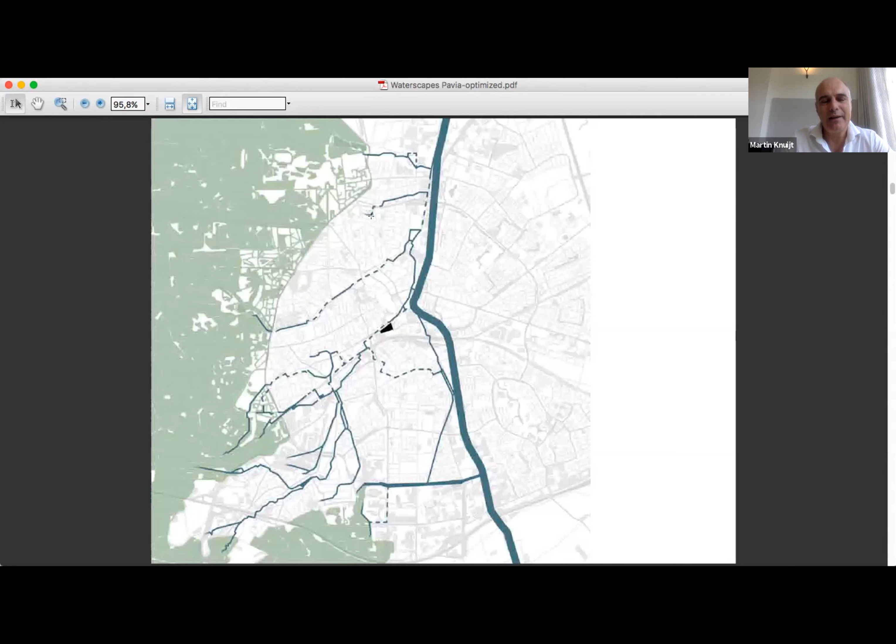The project area you will find in black. But what is important is actually that the city has already been working for about 25 years on restoration of this small brook system. And we advised them in this to bring water from, again, within the city, to disconnect urban areas from the sewer and bring clean water at least to these brooks, and then have the sewer only available for black water.

Once we zoom into this small area, the original situation was that there was a parking lot, and the parking lot was completely taking this place, and the brook was not present anymore. It was just in a tube underground. So that's the top image at the left. And then we first thought, okay, what we need to do is bring the brook back in space, because it is valuable water. And so we brought it back.

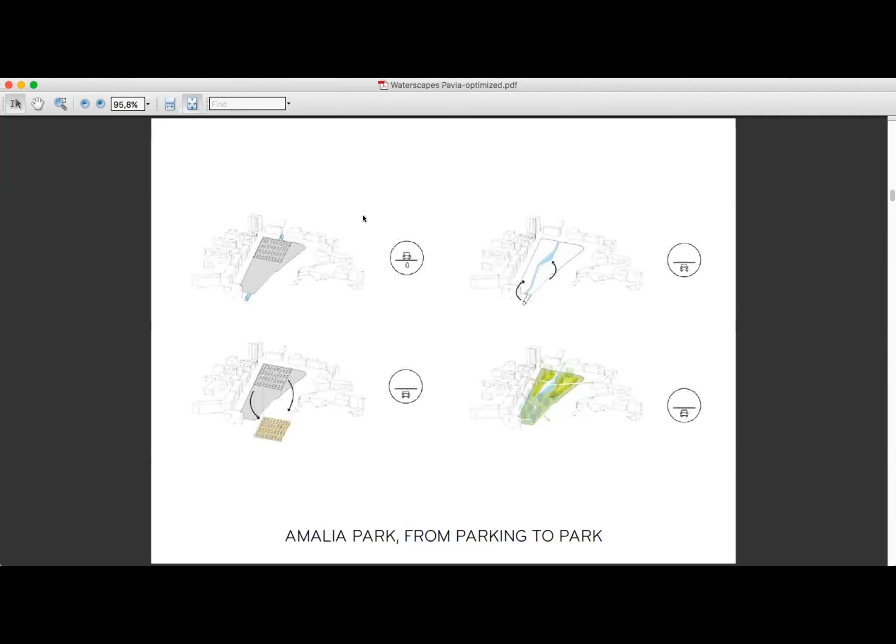That means that, of course, you have to do something, because either you have to remove the parking, or you have to decide that the parking will be underground, in an underground parking garage. Of course, it was easier said than done, but people accepted that at least we should invest in an underground parking garage. And then we said, well, then we also want to make this small inclined landscape on top of this parking garage, so that when you look at the area, it's a park, and it doesn't look like something transformed, as still a parking lot.

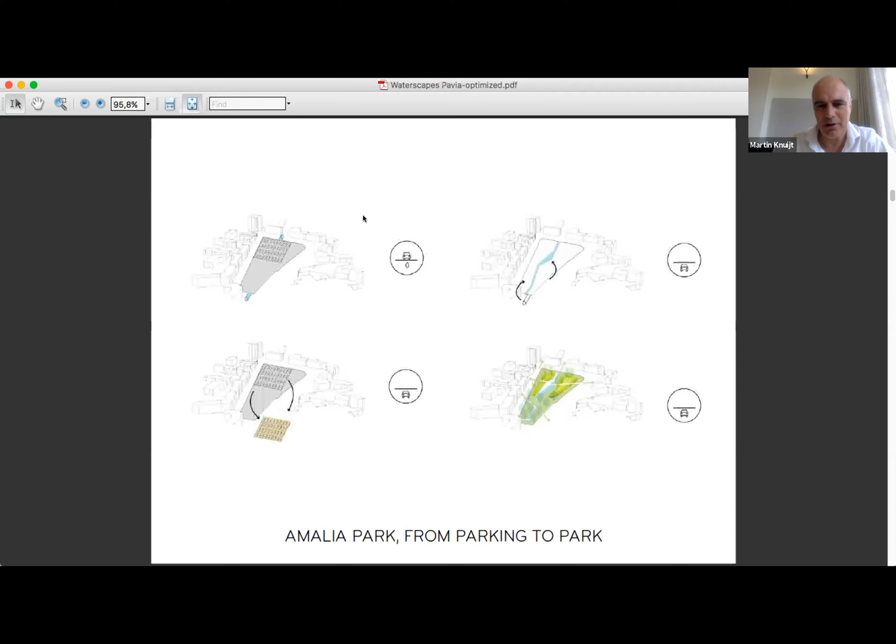So the design was made, and we said, well, it was an artificial brook, so it's not a complete river system, but we want to give this area the notion of being a green entrance to the city center, and also provide the right water qualities. So the pipes from the roofs of the homes were disconnected from the sewer, and this water was brought via underground passages. These underground passages are already filtering, because it's soil. So clean water was added to this brook.

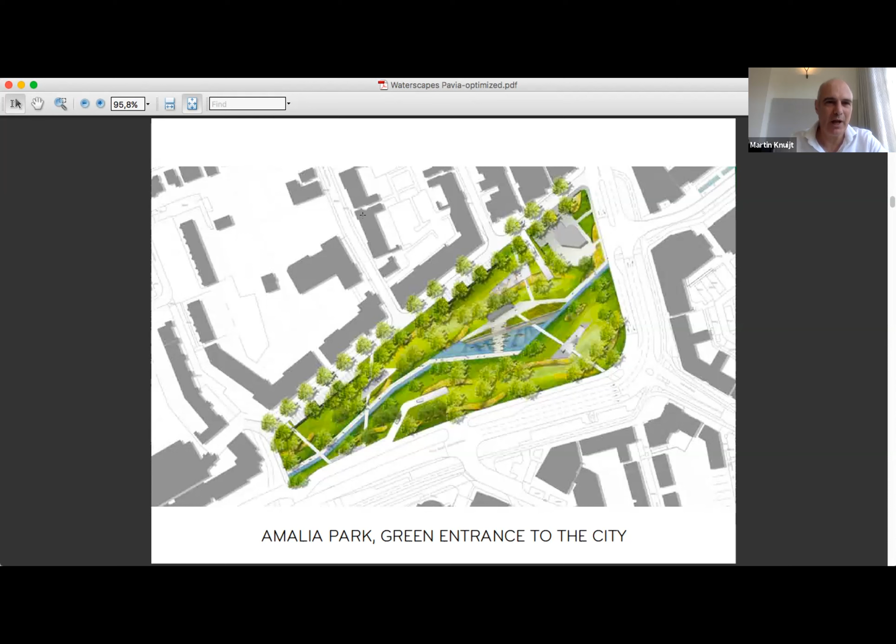We put some stones in it to give it the right speed of streaming, so that it was good for ecology. Sometimes you don't see ecology, because it's just small animals and fish within the brook, but it has its value. So we said, well, let's maximize the softscape. If it's a park, we need to have paths, but it would be better to see only a path along the water and not just everywhere. So we made it slightly hilly, and then we carved the path more or less in this landscape. So from this perspective, you hardly see where the east-west paths are.

And then here you see the brook, and that is revitalized. In fact, you could even drink from it, but you better not tell people that, because if children drank from it and something was wrong with the food in the evening and they had troubles with digestion, people would never blame it on the food, but they would say, oh, you've been drinking from the brook. But in fact, you could. The water is that pure that you can drink from it, even though it's urban water. And this is the image of how you can see it. That's the green connection to the city.

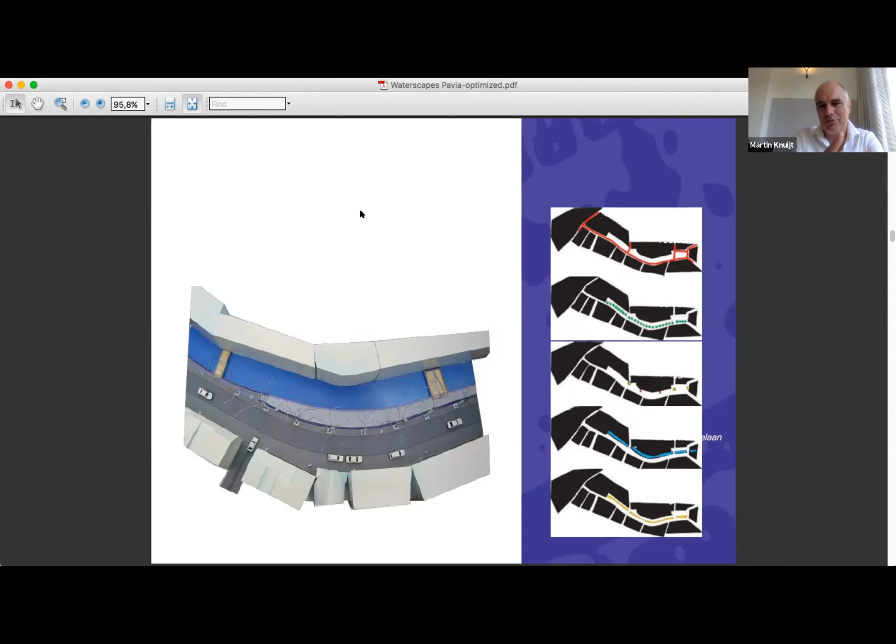We bring back the water, of course, and we said, well, we need also to bring in light. The first studies were just with a simple model to show how it could work. That you organize, let's say, still some through traffic, you organize a walkway along the water.

This is the plan. So gradually we got more into it, and we found out how we could do it with all the restraints, because it's working in a very urban environment. So it's never easy to change the area back. You have to bring a new layer, because it's not about reinventing history, but it is adding to today and tomorrow.

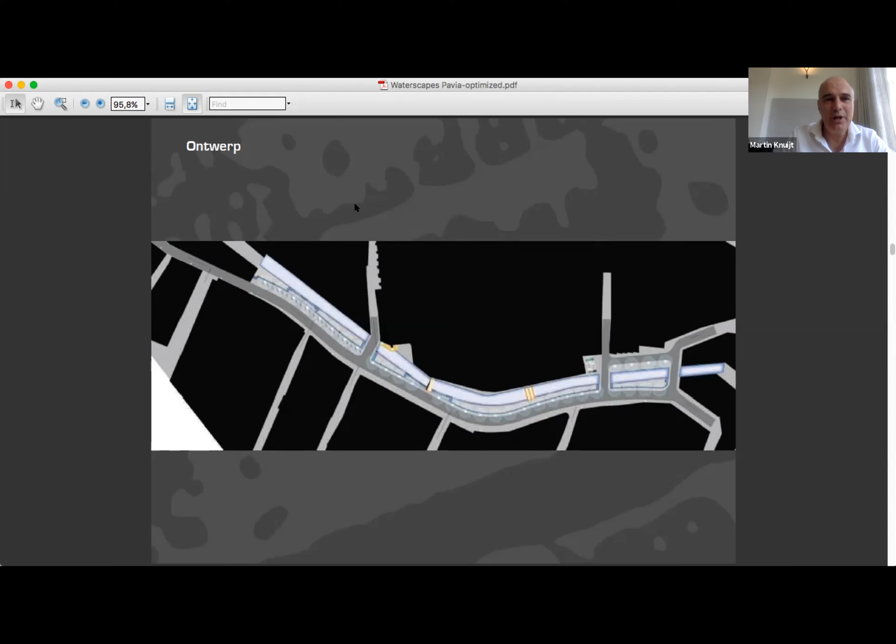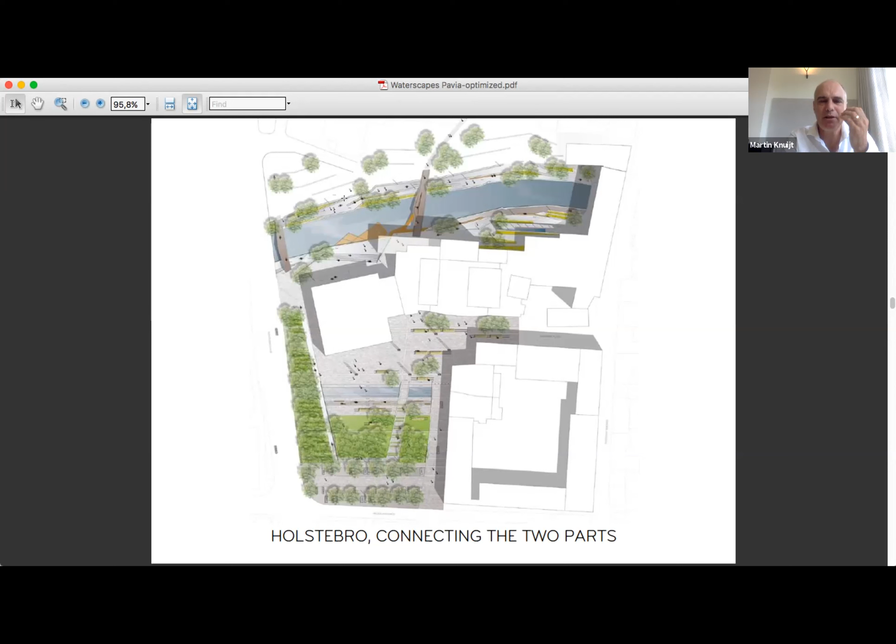At the southern part of the dance theater, there was a parking lot. Again, parking lots. People really liked parking lots at some time. But nowadays, we said, well, you really need to reorganize parking. So in this case, we reduced the parking to the very southern area. And then there was at least space for outdoor events. And in this case, it is also about water as a pleasure.

So the outdoor area at the south, we said we make a small water basin, which can capture the light sometimes. And if, for instance, there's a big event, you can even switch it off, and then you have this whole space available for people who can have a party there or have a theater there. The steps are, let's say, almost like an amphitheater.

At the northern area, there we created the lower area, and always created at some places areas where you could connect. So the wooden steps are going into the water, so people can even use it as a podium. So if there's a small event or something that takes place, it works almost like a theater. And since it was a dance theater, we also wanted to have this function outside, so you can play with it. It's not just only saying we capture the water, we do all these items that are really important for climate adaptation, but we also want to make it a scenery for people.

And now, another picture. The bridge is folded in a way that the bridge also becomes part of, let's say, the area, the amphitheater, so people even can sit on the bridge if you would take the time. And here you see how the lower area has planters and gradually the ramps to the higher areas.

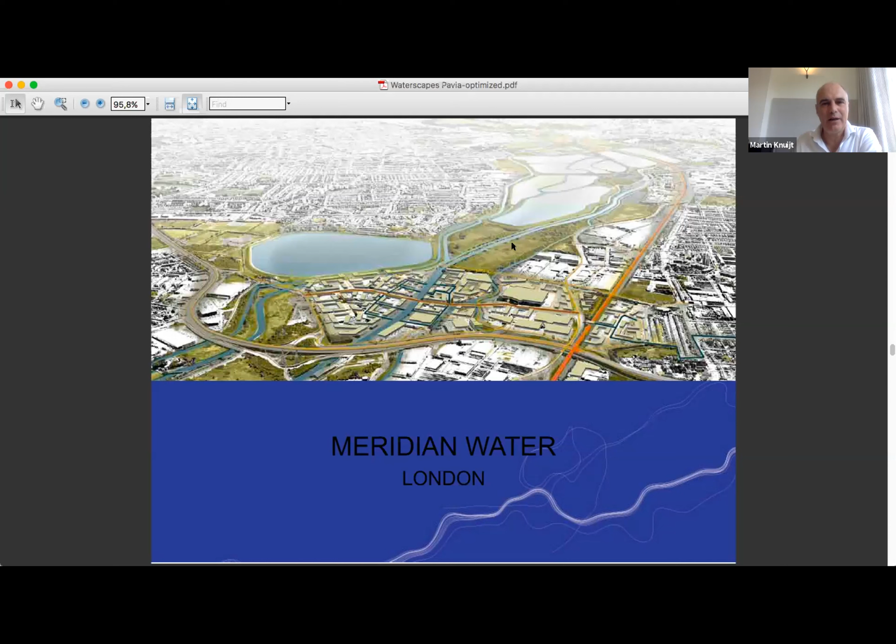On the other hand, there is the old area. This is at the right of the location. Here you see the location in orange. Below you see the River Thames, and it's the River Lee that runs from north to south. At the west of this area, there is Edmonton, and we also made plans for another 85 hectares, which is existing city. So to compensate, for improvements in public realm for the people that actually live in the adjacent area, not to forget them.

In the master plan, we said, well, think about all type of water interventions. We said we are familiar with water, but we need to categorize them in 4 categories. The first category is actually to prevent the area from flooding from upstream. There are 2 brooks, the Salmons Brook and the Pymmes Brook, and they bring water, and also the River Lee brings water. And then once there is a large amount of rain, of flash floods, the area can be inundated. So the first category is the protection category. And you can do that via dikes. You can do it via inclinations in space.

So there are all types of instruments, and we made an icon for each instrument. And we also labeled them in terms of, will it be easy to realize, what will be the cost. So in fact, every icon corresponds to a page of a document. And the document was, of course, also provided to the government.

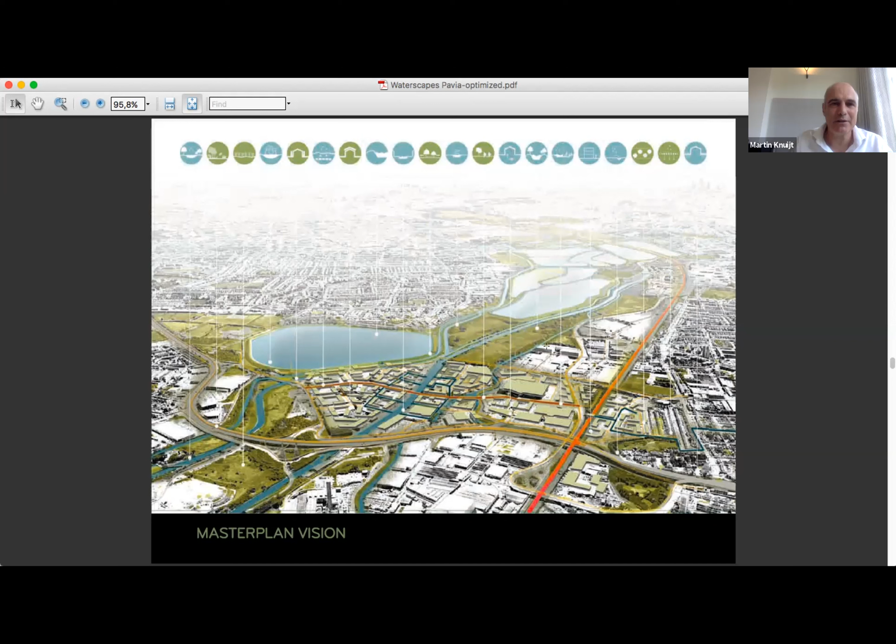You have seen it already in the Danish project, the Mechelen project and the AUDe project. We also try to make it an urban space. So water as a pleasure for people is also an important issue, even though it's not the protection directly, of course. Here you see some of these tools. You see a new canal and another new canal. You see the urban development in between. You see green roofs, green inner courts, green along the courtyards.

So we try to capture the water within the block, bring it back as slowly as possible to the urban public realm, and then gradually store it, of course, in vegetation buffers. We raise floors, so make sure that the floor level of the building is not really affected. And in the more natural area along the River Lee, we also use this parkland for water retention.

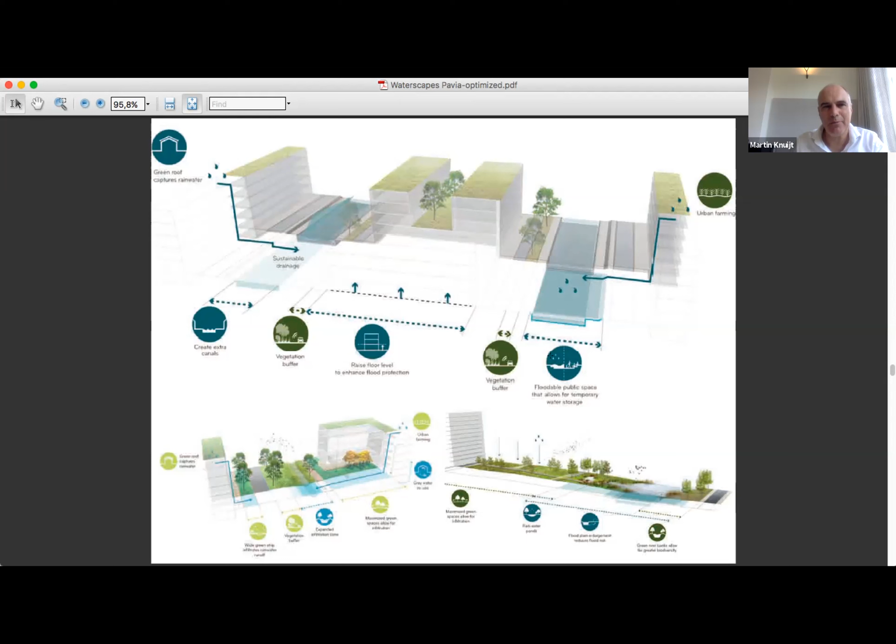At the right bottom you see the natural area, and we slowly slope it with some inclination. So if there's sometimes a little bit more water, we capture it, and you get situations where you actually have water for some longer time, and you have different gradients that increase biodiversity. And here another series of these sections and tools. You see in every urban situation, you can apply different tools, and the different tools are linked to this book of the toolkit, as explained.

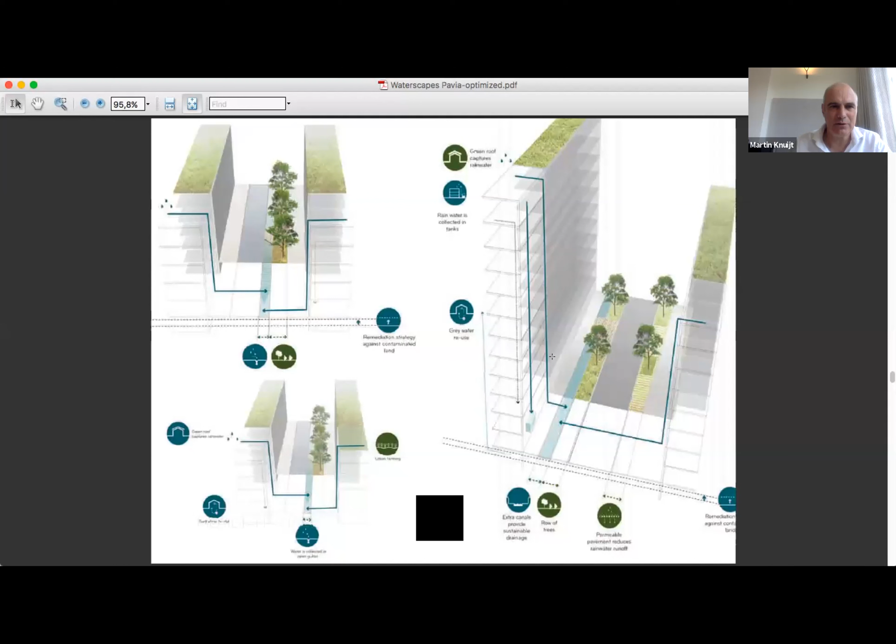Then in the first phase, we said for Meridian Angel there should be 1,000 homes, but not built immediately. So this will start with half. Then we said, well, okay, in this area you can already start thinking green. If you're not building up everything, maybe you could make your nursery for planting here. That makes sure that if you plant trees in the public realm, at least they've been raised in this area.

So you already have the advantage of getting larger trees for the price of a smaller tree. You also have an area that becomes more attractive than if it's just wasteland. So the nursery is also a quality for public space. We also said, well, you can do some urban farming here in the meantime, and of course at one moment it will vanish because gradually you build up the area, but it can also move to the next phase.

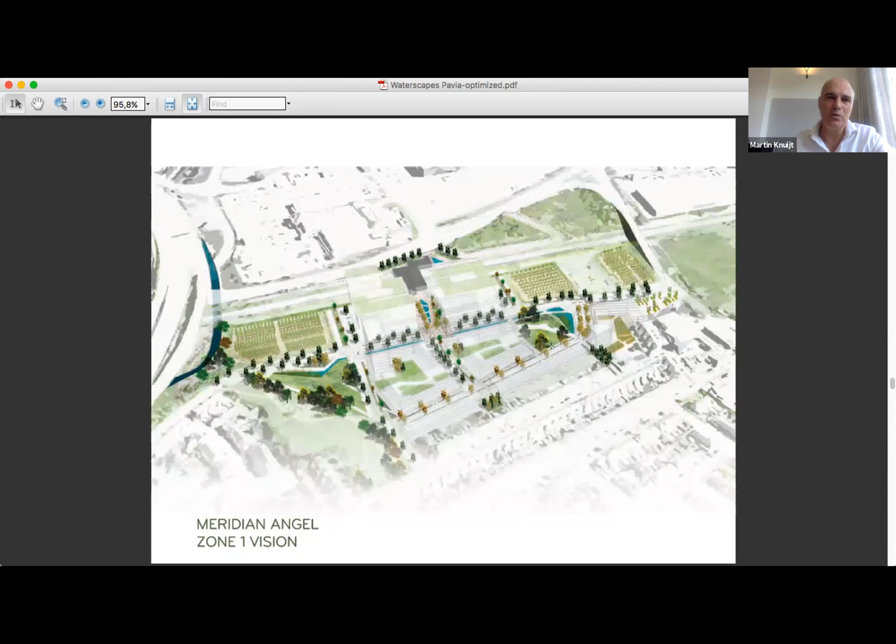Here on the larger scale, you see there's also a kind of link to the tools. If you look at the smaller area, this is along a brook, this is how it can work. The brook had all hard edges, so we change the hard edge into a soft edge. We make a gradient in one area where there's a lot of space, and gradually the brook can expand if there's a lot of water. But once you need the water for the planting, we also make sure that it can infiltrate, so it's all soft landscape.

We make the green banks softly sloping, so you also get this gradient, which is interesting for diverse plants, and also make sure that the water itself is pure and purified, so that it's also worthwhile for ecology.

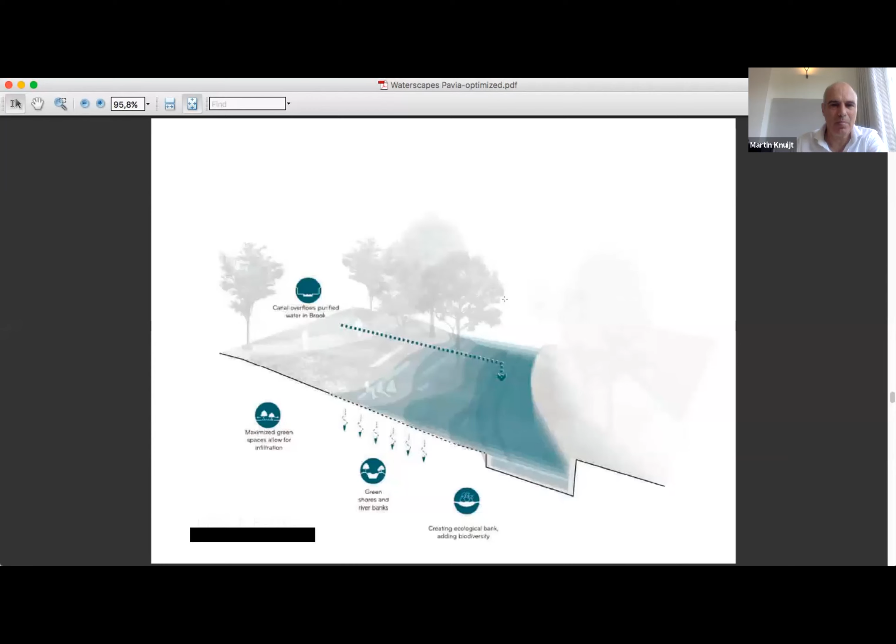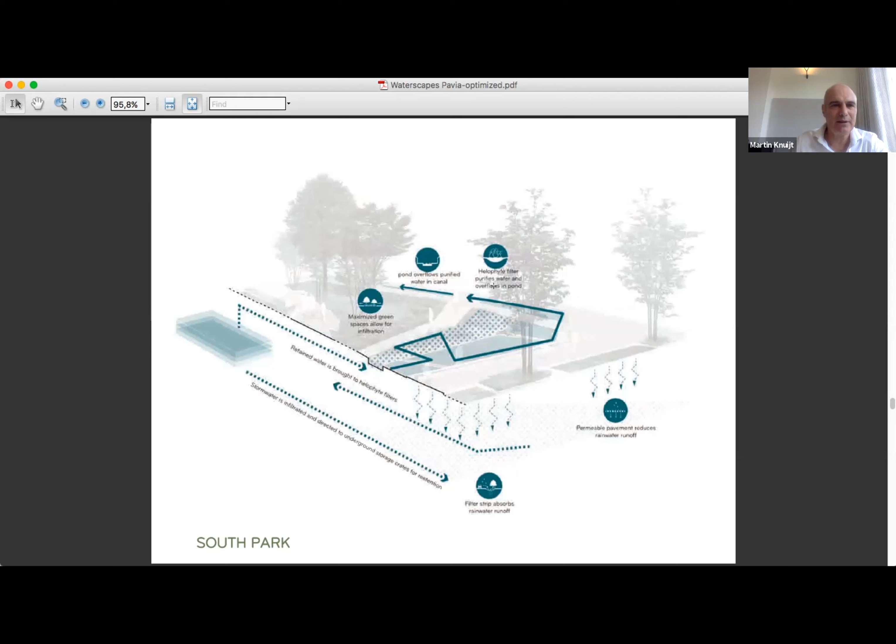This is another diagram of one of the parks where we capture water and bring it back. It's a park more in the urban environment down south, so there we are not linked to the brook itself. We capture the water and create a water pond. We make sure that the water is also celebrated in a small park, that there's some infiltration, and at one moment we bring it back into a small canal, and that canal leads to the brook.

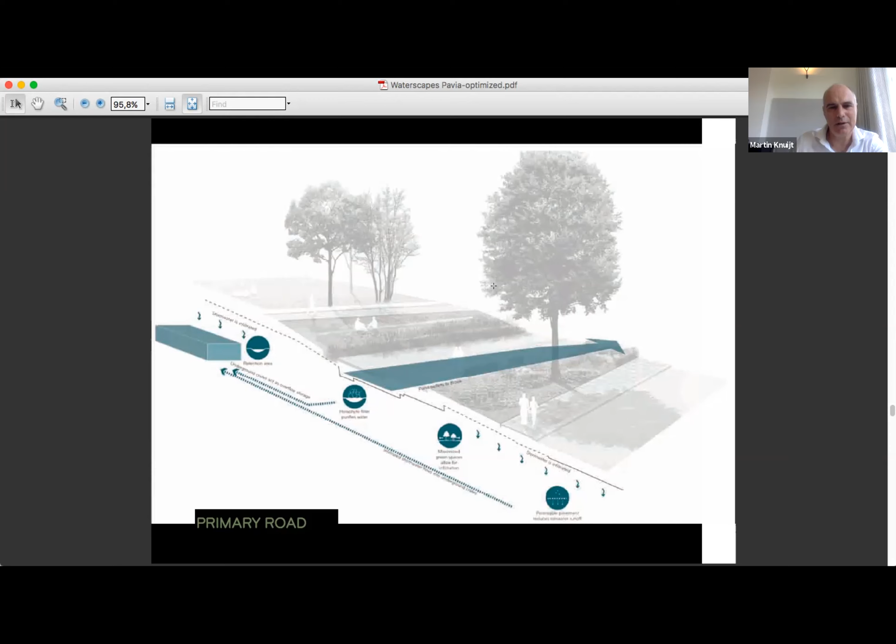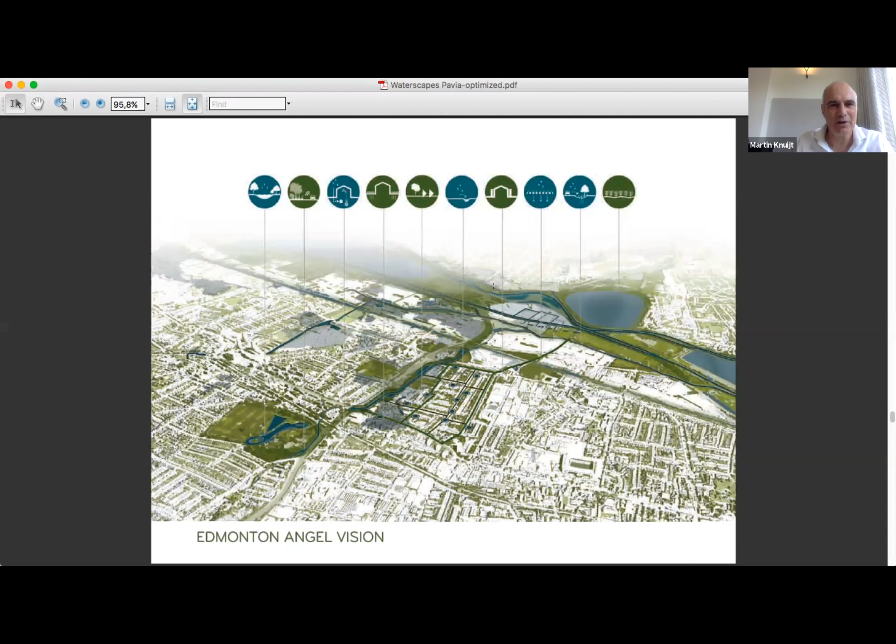And on primary roads we also expand our system so that it connects the water for the adjacent area, which is actually a very densely populated area, and where even more people nowadays live, because some of these homes are quite big, and they were changed over time to 8 apartments instead of just one home. So there's a lot of parking places in the area. The public space is asphalted. Sometimes even the front gardens were completely asphalt or concrete.

So we said, well, if you want to change these 85 hectares and you don't know which area you can start first and you have a limited budget, you should have a strategy. And the strategy was, let's bring in rain gardens and let's bring in tree planting. So we said just plant as many trees as possible. And most of the time we start thinking about a realistic number that could be achieved. It's also putting some pressure on the officials to really realize it. Once we are gone, it's really funny, but in many places I've heard that the number stays.

1 month ago, I had a talk with one of the city officials in Rotterdam. He said, oh yeah, once you had this vision for Rotterdam city center, you said that we should plant 1,000 trees. You're a really nice guy, he said. Yeah, now I'm at 950, but it's really hard. So 7 years later, he was only at 950, but he's still trying to get this number of 1,000 in. And I liked it very much because, of course, he had this problem realizing this, but since he was an official of the city, he's still working there. So he needs to do this. But the nice thing is that we get these trees in.

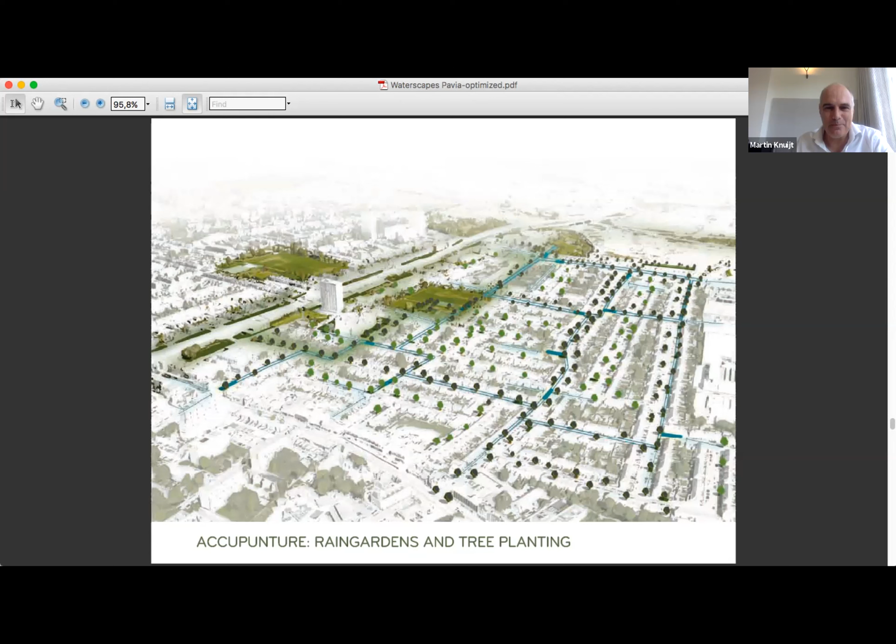And here you see the public-private intervention. So even in this water story, we try to create green roofs at some places, try to create green corner gardens, and include also the private area. So for the private area, we have tried to make some people enthusiastic, because the city, of course, cannot do that much. It is private land. And for the corner gardens, it's city's land. So we said it's really important to start at the corners and make these green, because that also is very important for the image of the street.

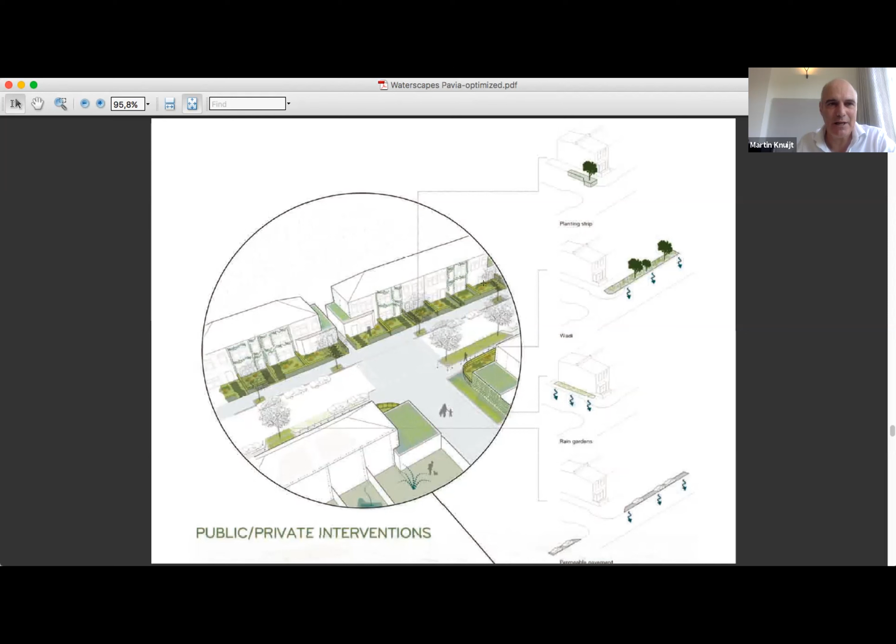Nowadays, it is a street with only cars parked at both sides. If you just plant some trees at the corners and create a green corner garden, then already at the entrance of the street, you see green instead of parked cars. So it's not the number of parked cars that you change that much, but it's changing them at a strategic position. And here you see one of the images, how it works.

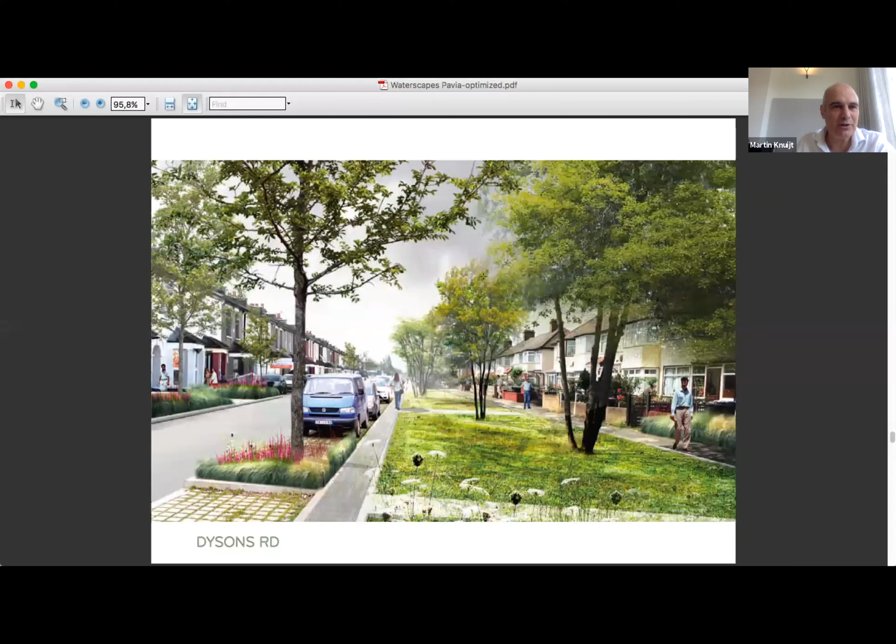So we said, well, we create what we call a wadi that is suitable for water infiltration. We create parking places where at least water can infiltrate. We planted some trees, not only at the corners, but also some in the middle. So with just a few trees, we already changed the perspective of the street. And the strategy is also that it can expand. So in streets where you can reduce parking a little bit more, you plant some more trees, and you can even change it over time. You don't need to do it all at once.

The last project I would like to show you is Athens. We are now moving to a southern European city. Many of these examples were northern cities. And of course, you can say, well, in the north, you have a lot of water. So there, it's fairly easy to capture the water, to make it infiltrate and make it work. You might have a bit more problem with flooding, but in the south, it's different. The bad news is that, of course, it's a bit different, but it's not that different. In southern European cities, there are also a lot of flash floods.

And when I told the people from Athens the strategy to capture water during winter and make it available for the summer, they said, oh, we don't have that much water in winter, so it doesn't work. But just 2 weeks after my first presentation, there was a really big flash flood, and cars were actually floating in the city. So it happens, it happens.

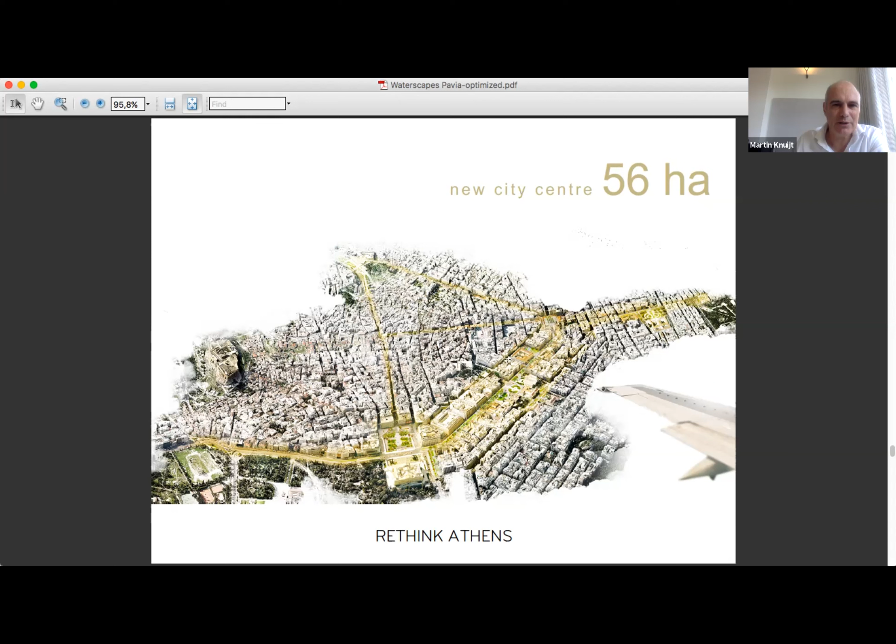The project is about 56 hectares of new city center. Our existing city center, but new transformation, that's how I should say it. It was called Rethink Athens. So it was thinking about how the city can change. And imagine the main corridor, the dotted line in the middle of this picture, from northwest to southeast. That is Panepistimiou, and it is 6 lanes of cars, 6 lanes of cars in the city center.

Of course, in Rome, there are some big traffic arteries, although now there's also a policy for change. In Milano, you have some big arteries, and they are already under change. But this is even more, and it is really close in the city center.

So we said, as a first approach, that first in the city you should create a coherent green network. There are already large green areas, but they're not really connected to the daily living environment of people. And you should link also these areas to each other. Then at least you get ecological value. You get also a value of, let's say, green corridors in the city.

Meanwhile, we were thinking about heat mitigation, and what you see here is the tools for heat mitigation. We also try to approach it in a systematic way. So there are tools: the green tools are linked to tree planting and all kinds of green elements. The blue ones are linked to water in the city, and the other color, which is, let's say, a fairly vague orange or pink in between, is linked to hardscape.

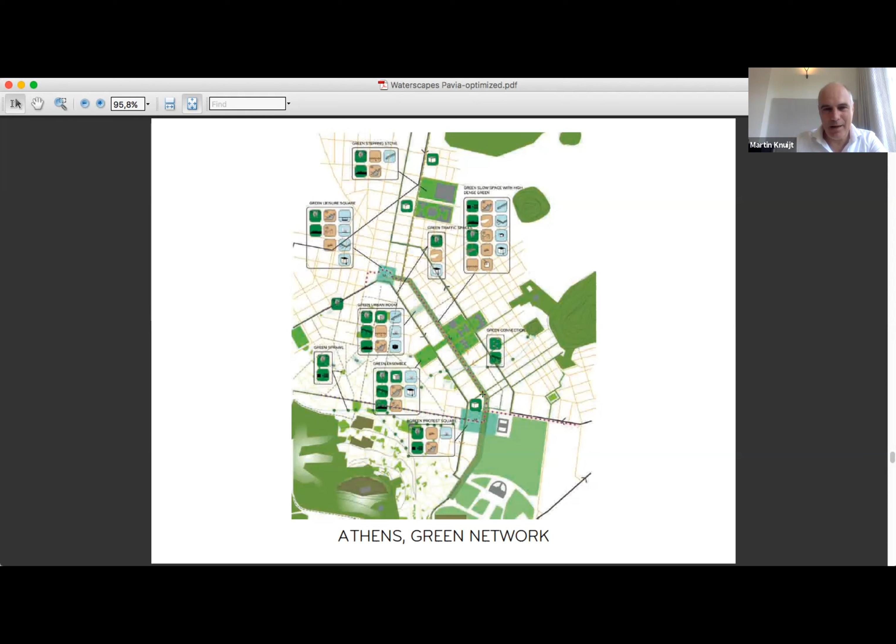Of course, if you want to do something on heat mitigation, tree planting is crucial. A tree makes 7 degrees temperature reduction on a hot summer day at this very spot of the tree. Water, just 1 degree. So that is quite a big difference. To plant trees and to make these green structures, you need to change mobility. So we said, well, first we're going to change movement to make space for green.

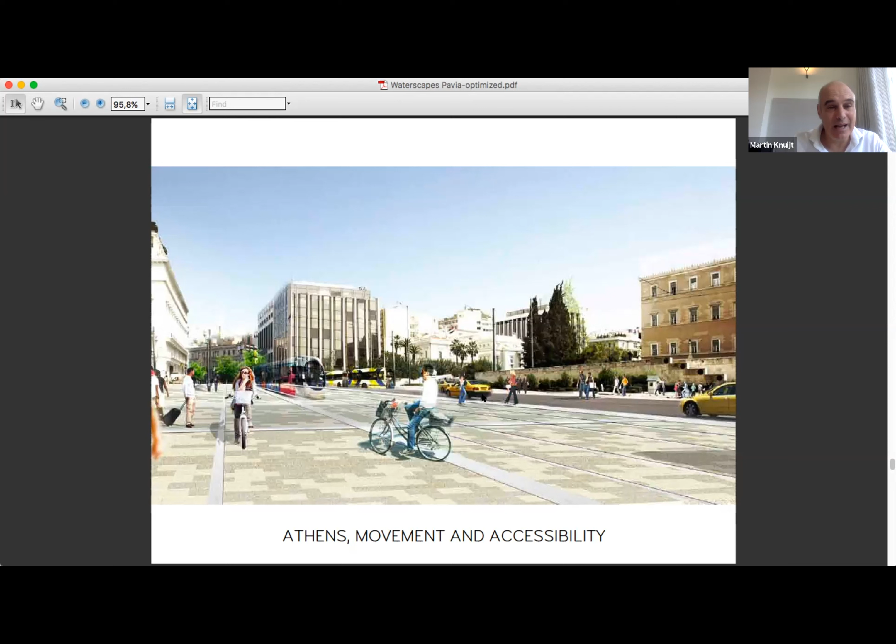So it's not just that we dislike cars. Everyone can drive in a car. But mobility should be rearranged. So at one moment you should realize that you should leave your car and take the public transport or take a cycle. So if you get more adapted mobility, thinking on where do I need to be, what time can I be there, and what is actually the accessibility available, then you can actually change public space because you don't need that many cars.

And if you think about what is actually the space that a car takes, let's say one car, if you take the 12 square meters that a car takes, many pedestrians can stand there. So a car with one person or many pedestrians. So we said, well, we need to change it. We should start thinking from the pedestrian, because in the end, we're all pedestrians. Even if you come by car and park your car in a parking garage, to your final destination, you're a pedestrian. So the pedestrian, we put in focus.

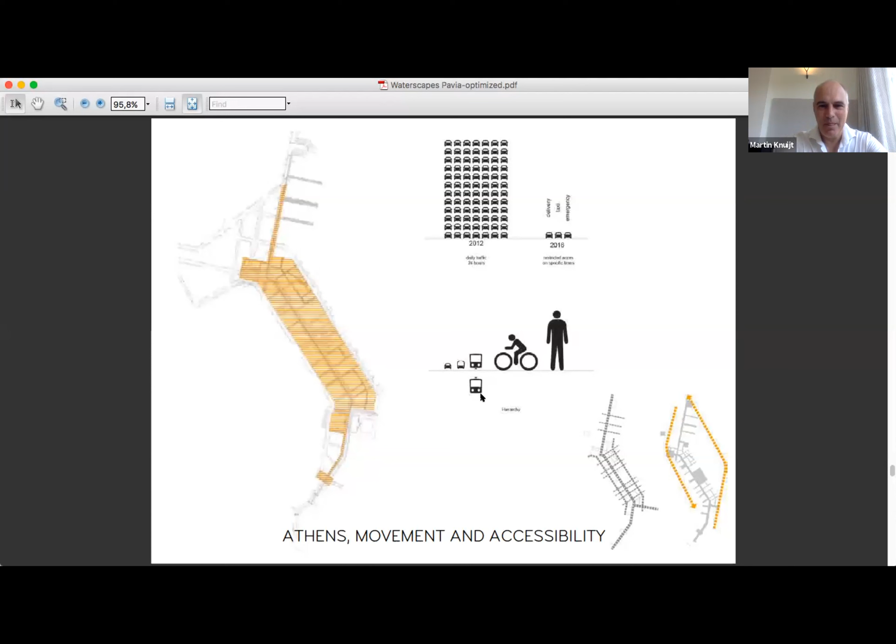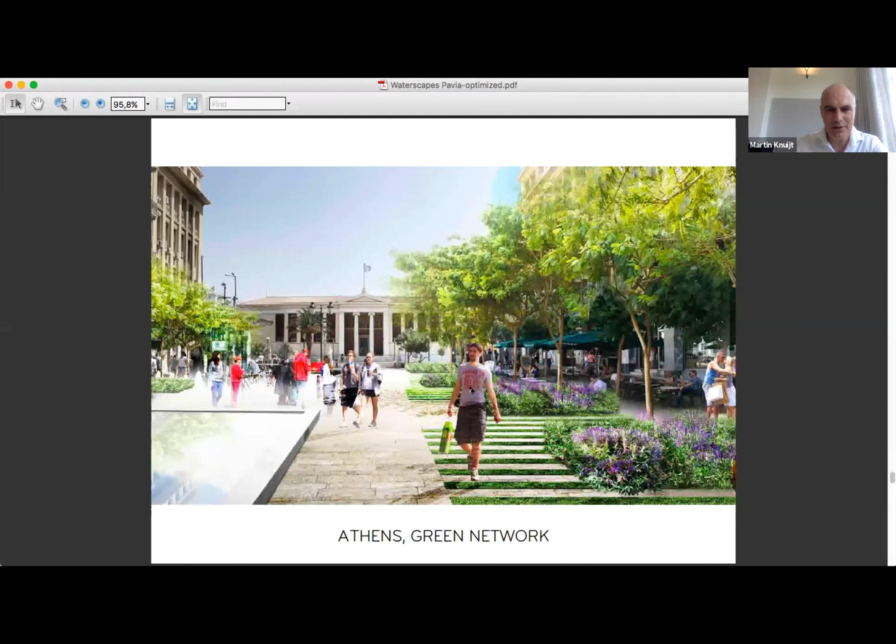The true capacity of trees is the 7 degrees you get at this very spot of the trees. But if you design it cleverly, you can achieve 1.5 to 3 degrees on every single piece of this whole area, even if there's no tree yet, because in the end the tree is actually creating micro winds. Because the tree leaves evaporate, these micro winds create a little cooling effect.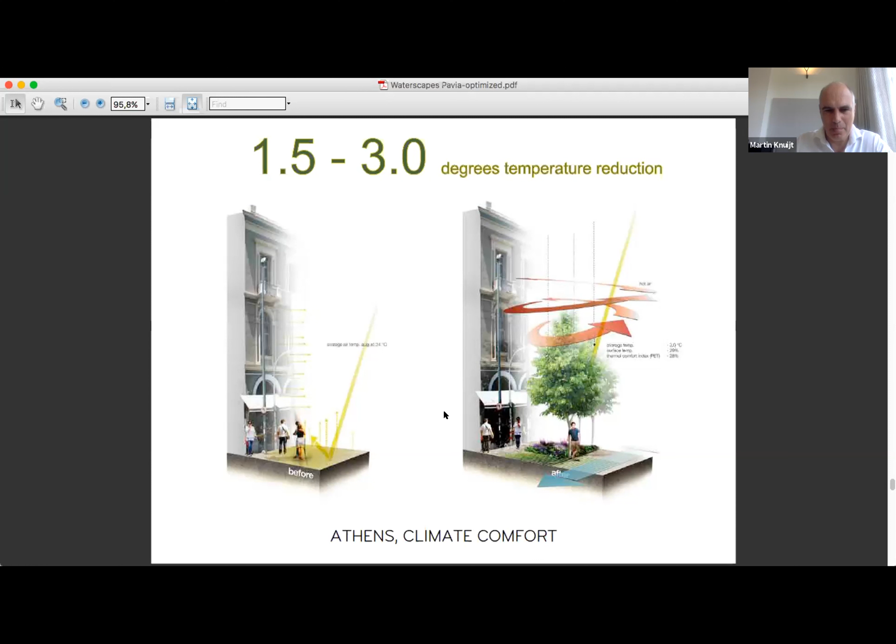It also means that there's not only the real temperature reduction, but there's also the index for how you feel. So if there is less reflection of this heat during a hot summer day, it also has a big quality for people's perception of heat. Meanwhile, we said, well, apart from shadow, you can create more diversity and you can create seasonal effects. So with this planting, you can also contribute to biodiversity.

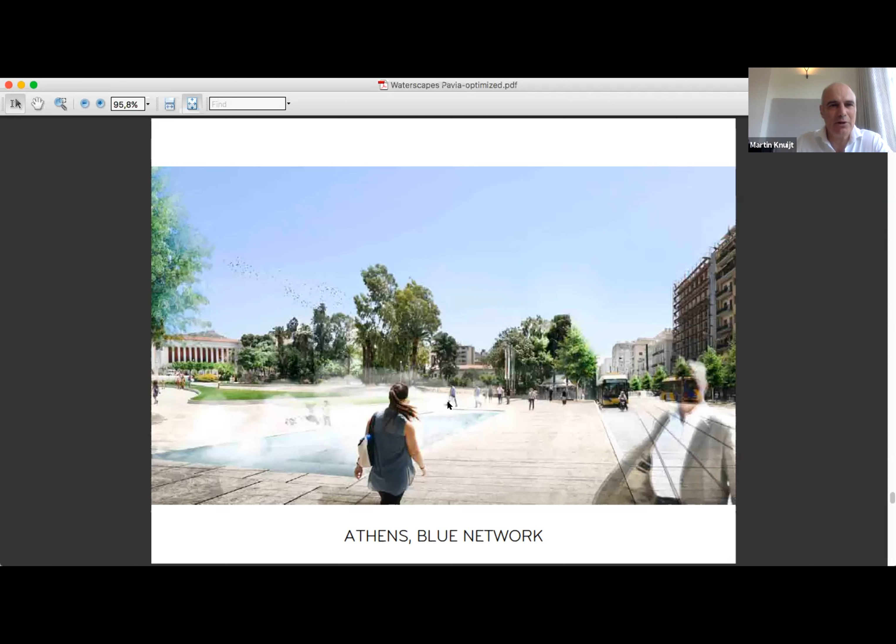The blue network in this case is not a network of rivers and streams. There are already some rivers somewhere in the city, but mostly covered and hard to reveal. But we said, well, what we can do is capture the water from the hills and store it in underground crates, and make a connected system of this. So that's actually the blue network. Here you see how it works. And initially we were close to 11,000 cubic meters, but then I spoke to one of the professors, and he almost got tears in his eyes.

He said, if we can get this for Athens, it would be really great. But he said, could you just ensure that it will be self-sufficient? So capture as much water as the plants need. And then we tried to enlarge the system a little bit more. This is more than 20 Olympic swimming pools. So it is a huge system, but it's done in a linear way.

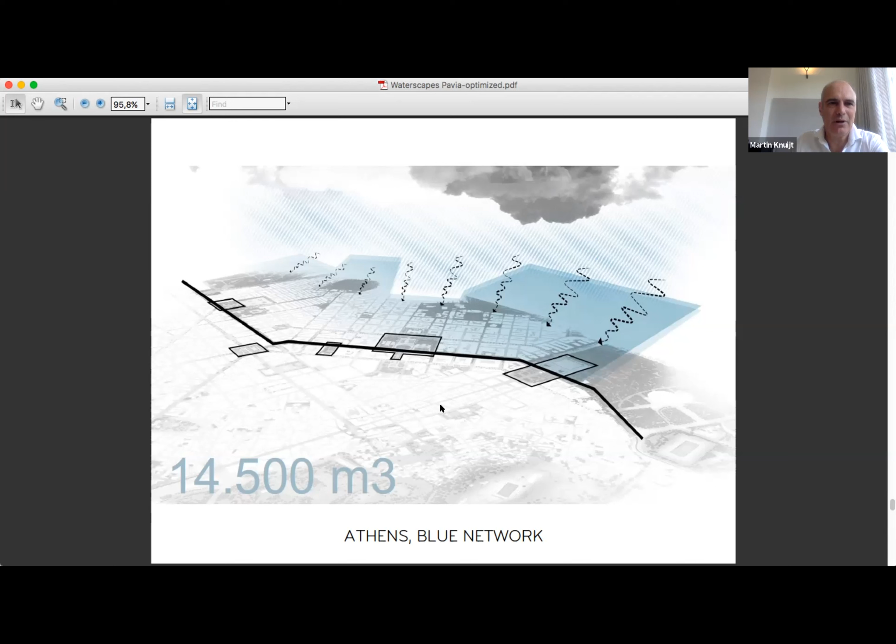So that's how you can bring it underground. And here you see how more or less it works. During winter, there is some rain. There's a wet period. It's not as wet as, of course, in Northern Europe. So the system is dimensioned so that in April, every crate will be full. And then gradually during the summer months, you take the water from that system for the planting.

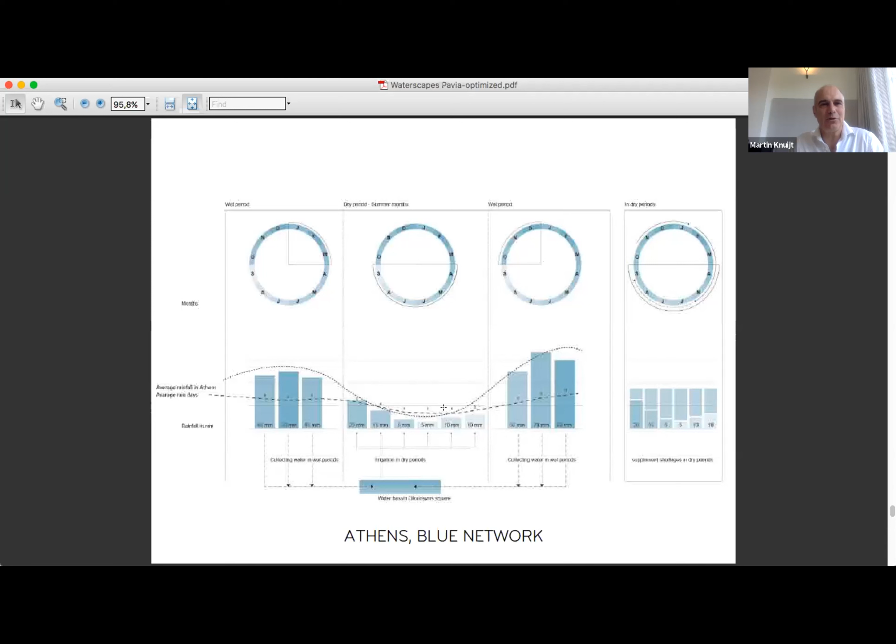The trees can evaporate, and then at the end of the dry period, gradually when it starts raining, hopefully your crates are just not empty, and then the system starts to fill again. That's how it's been thought.

Meanwhile, we also said, well, apart from that, there will also be the activation of public space. We're not just making this nice boulevard for shared space, a tramway, cycling and walking and taxis, but we also need to think about how the mobility system works and how we can activate. That's why we also created the theater of 1,000 rooms.

It was an invention, it's just a word, but I found out that during classical history in Greece, a theater was an important social feature. So people not only went to the theater, but afterwards they met people and went for a small drink or something to eat. So it is not just the theater, but the whole social aspect of it. And the theater was accessible for everyone. People with lower incomes paid less than people with higher incomes.

This whole social notion of the theater means that at one moment you can actually design with it. So I said, well, let's make the theater of 1,000 rooms. There are a lot of vacancies in Athens. At Omonia, up to 80% of the buildings are vacant. That is really a problem. The public space is dangerous. Some places are places where people don't dare to come. That's how the city center has been degraded. So the problem is much bigger than in many other European cities.

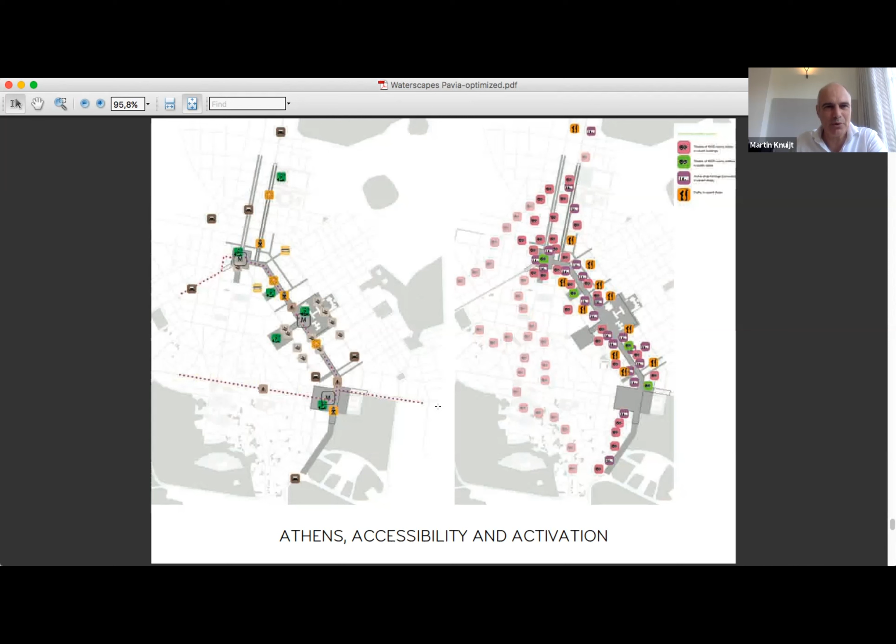So at the end, when we had made the definitive design, the project was presented in the Stoa, close to one of the squares, and these shops were filled temporarily. The Onassis Foundation, our client, filled all these empty, vacant areas, and suddenly one of the areas was vibrant. Of course, it was a short-term project, but at least you could see that it could work. And we are also thinking about how to create public space, sometimes in the open space of buildings.

Oh, I see something wrong. We're almost there, but now to the last pictures.

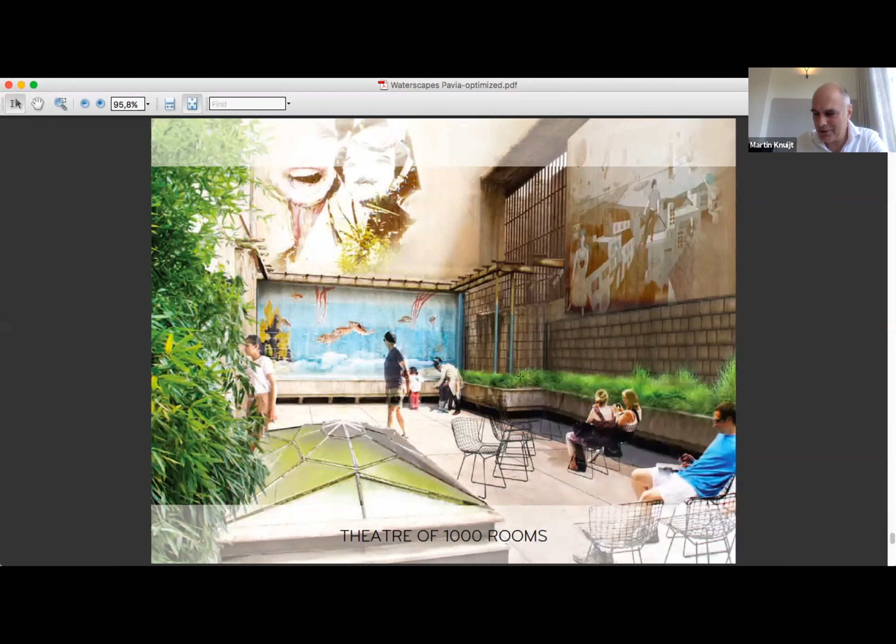Yeah, one of the big things was to connect spaces and places, and I think that's how not only this biodiversity and water story works, but it works for people here in the inner city. Unfortunately, it's not realized yet. The government was at the end of its term and didn't get the European funding. But there are talks ongoing, so we hope that in the near future we will complete an amended plan and then at one moment change Athens.

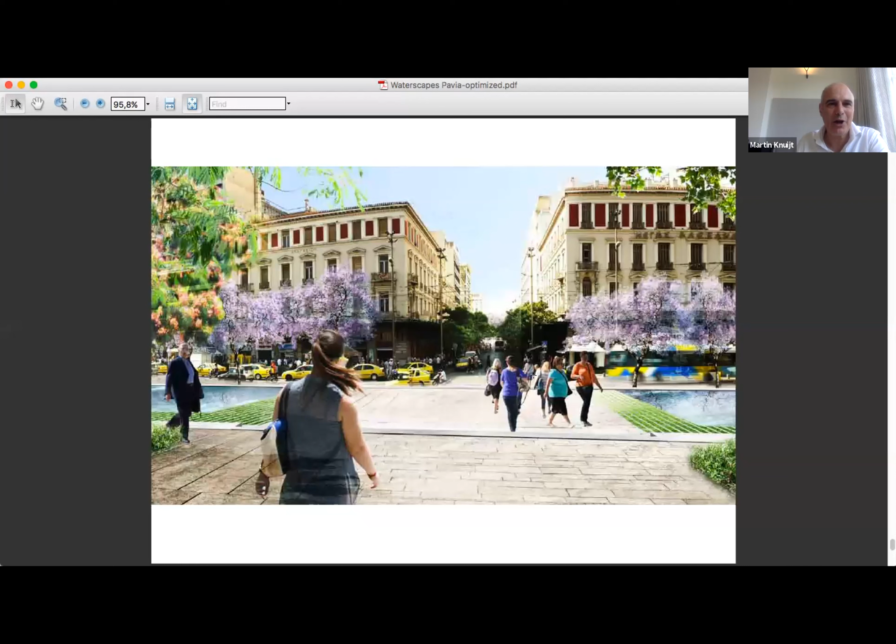What is the storytelling? The story of urban water interventions, I think, is thinking about how we can live in the city and how we can turn our spaces into more attractive spaces. How can we make them healthier for people? How can we enhance our quality of daily life? And I hope my lecture will bring some inspiration for you.